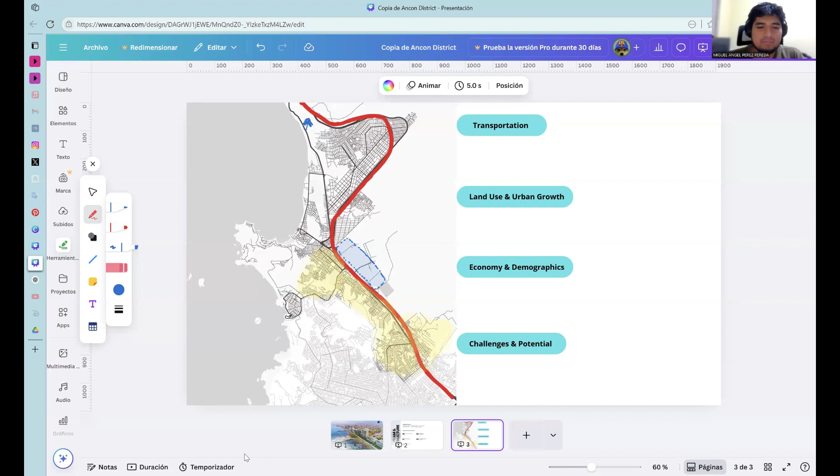Introduction to the study area. We selected an area of around 200 square meters with no existing infrastructure or housing. It's located at the intersection of main roads, which makes it a strategic location for future urban development. Within a 1 kilometer radius, we found access to the sea, exits, urban planning, and public services. All of that makes the site ideal for urban consolidation.

The zoning map shows this land is categorized under other use, but the surrounding area shows a clear trend towards residential and commercial development. We can observe that housing is progressively consolidating and commercial activity is growing along the main roads. This reflects an urban transition process influenced by accessibility and demand, which should guide future zoning and land use conditions.

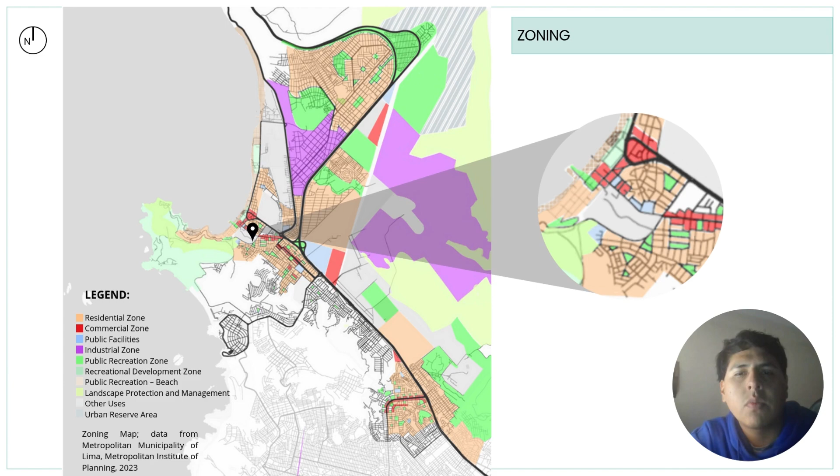Arterial roads like Avenida Jose Carlos Mareategui and Avenida Julio C. Tello, collector roads such as Avenida Las Colinas, and several local roads - the main roads are paved and in better condition, while the local streets need maintenance. The buildings are mostly low-rise, not higher than four stories, preserving the human scale and coastal view. This height restriction is part of the zoning regulation to protect the district's historical and scenic value.

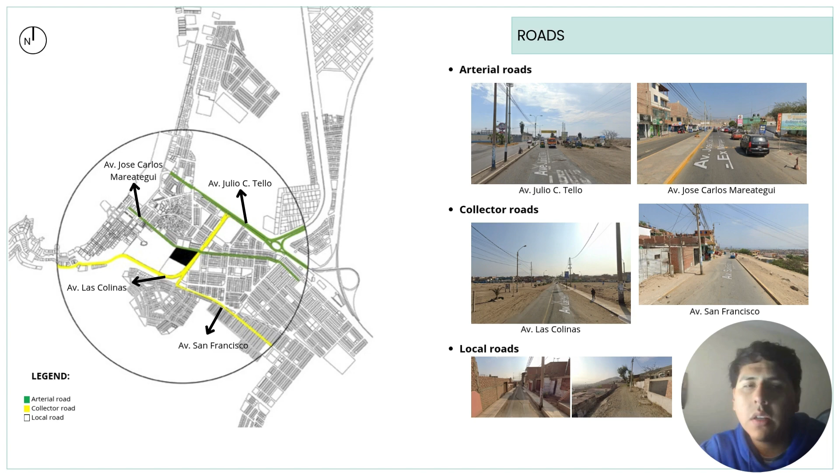Ancón faces both natural and anthropic risks. Around 45% of the area is exposed to tsunami, flooding, and seismic vulnerability, ranging from low to high depending on soil type. In 2022, a major oil spill severely damaged the local ecosystem and killed dozens of species. Social risk is also present, with crime rates increasing in 2023. This condition makes urban plan intervention necessary, with resilience and safety in mind.

This district provides urban facilities such as education centers, healthcare services, public squares, parks, commercial establishments, markets, and restaurants. Most homes have access to electricity, water supply, and sewer systems, although some areas still use cesspits or pit latrines. The main source of fuel is LP gas, with reduced pollution compared to other fuels. These elements may make Ancón a viable district for future development with proper planning.

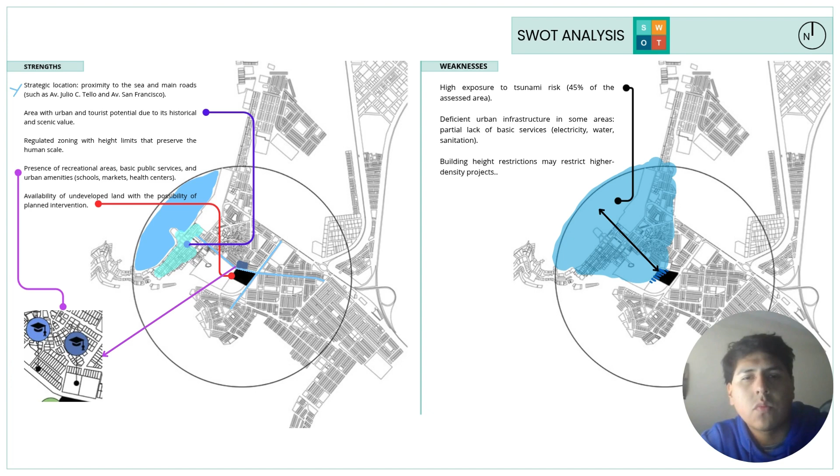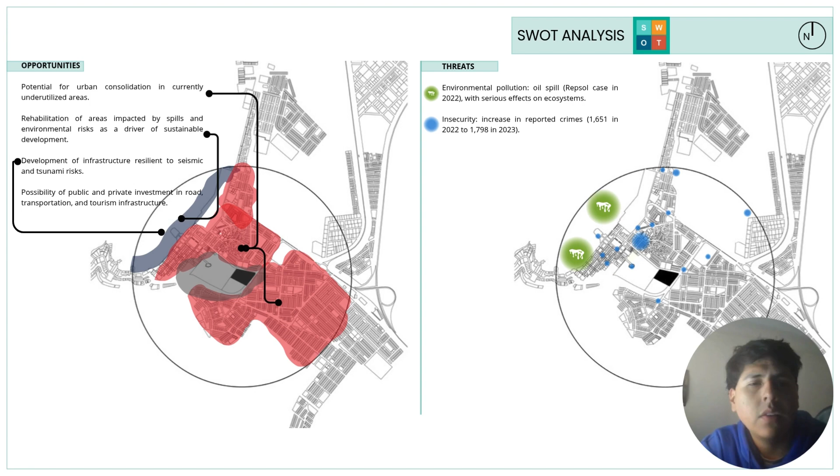However, threats such as environmental pollution and risk of crime, and weaknesses like basic service gaps and tsunami risk, must be addressed. We believe that with coordinated urban planning, Ancon can develop into a more sustainable and livable coastal district.

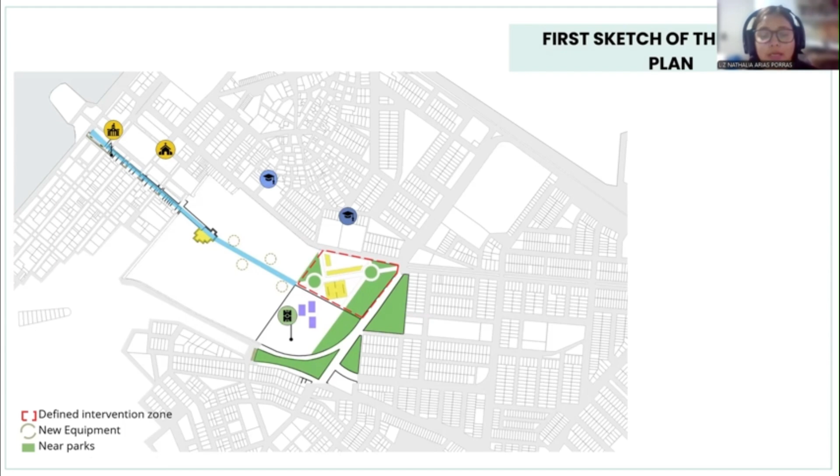About the first sketch of the master plan, our initial design proposal, we began by analyzing the existing context and nearby facilities. We found key public institutions such as the city hall and a church, and right in front of our project site there are two schools. Within the intervention area itself, we also identified a sport court.

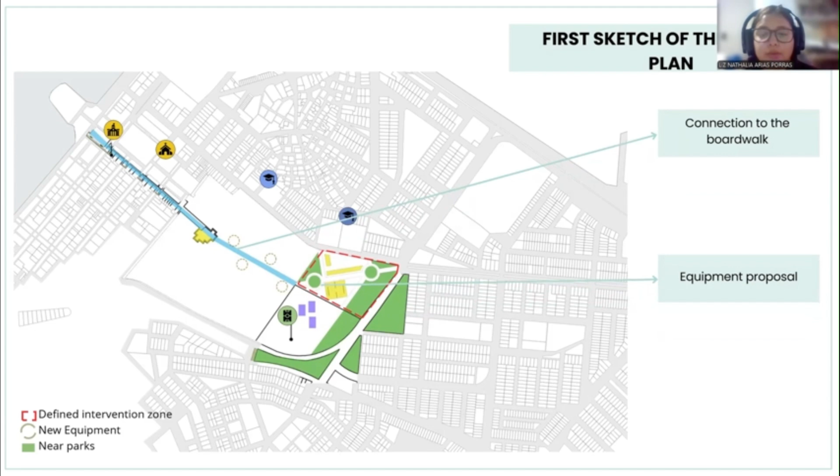Our main goal in the first approach was to create a strong connection between the waterfront and our proposal, using a linear park as a linking element. This green corridor not only provides pedestrian access and a landscape experience, but also helps integrate the area into the wider urban fabric. In addition, we introduced new public facilities that will complement the area and respond to local needs.

And finally, we decided to incorporate the existing sport court as part of the proposal, turning it into an active public space that promotes recreation and community use.

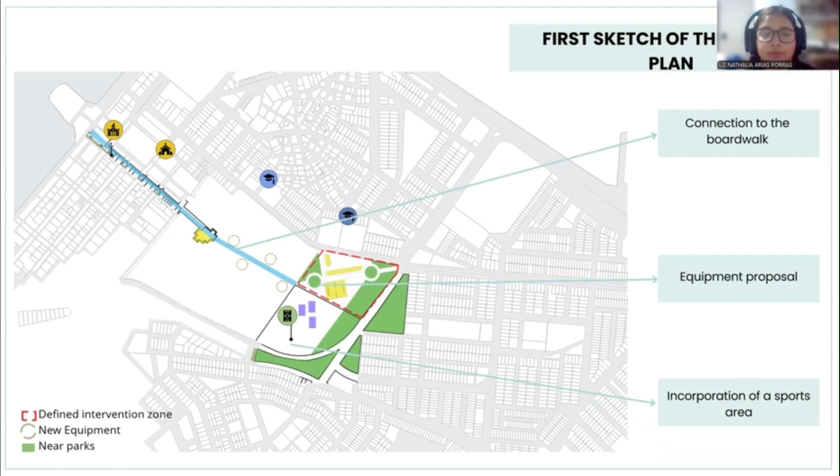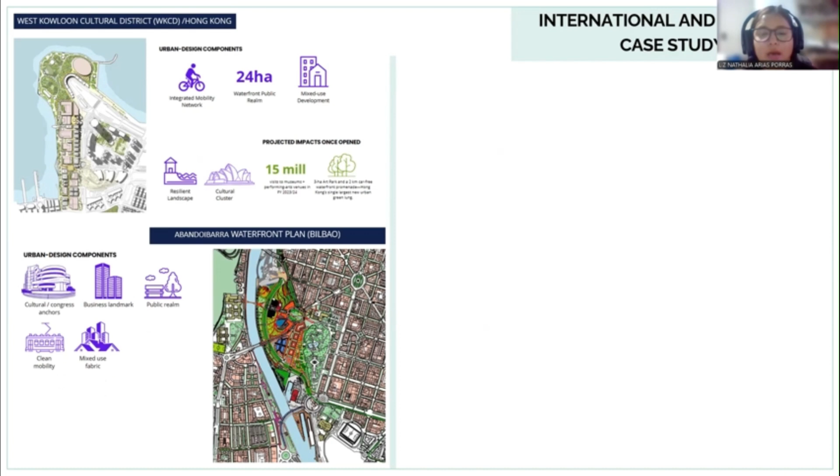About the second international case study, we present the Abandoibarra waterfront plan. This project was carried out between 1992 and 2012 by the public company Bilbao Ría 2000.

The transformation covered approximately 774 acres of abandoned dockyards. The plan prioritized green public space and pedestrian accessibility.

In terms of urban design components, we have cultural and congress anchors, business landmark, public realm, clean mobility, and mixed use fabric.

About the impact and observed outcomes: include 1.32 million visits to museums and 200,000 square meters comprising the park and river walk.

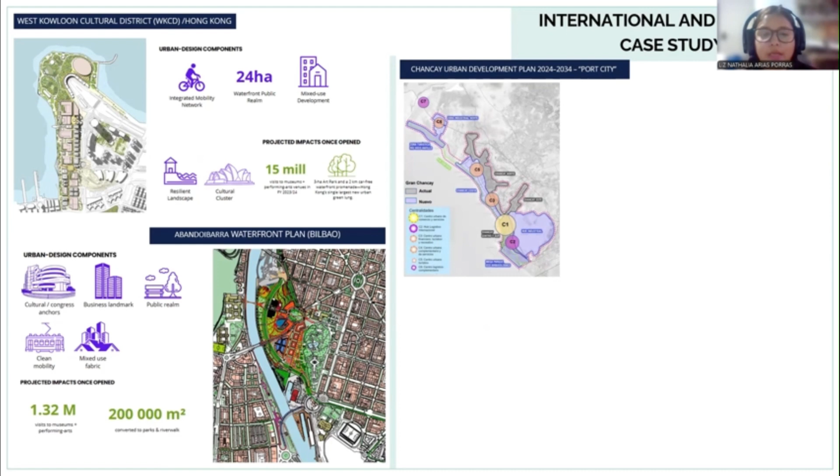About the national case study, we present the Chancay Urban Development Plan. This is located in Chancay, Peru. This large-scale urban initiative positions Chancay as a model of sustainability and progress for South America.

The project seeks to restore the coastline, protect natural ecosystems, and simultaneously promote development of a new urban center and tourist corridors. About the urban design component, the plan includes controlled vertical growth, green-blue infrastructure, 5-minute city, land management, and city-port transition.

About the project impact once complete: 66,000 annual tourist footfall and 122 projects to improve urban services and quality of life.

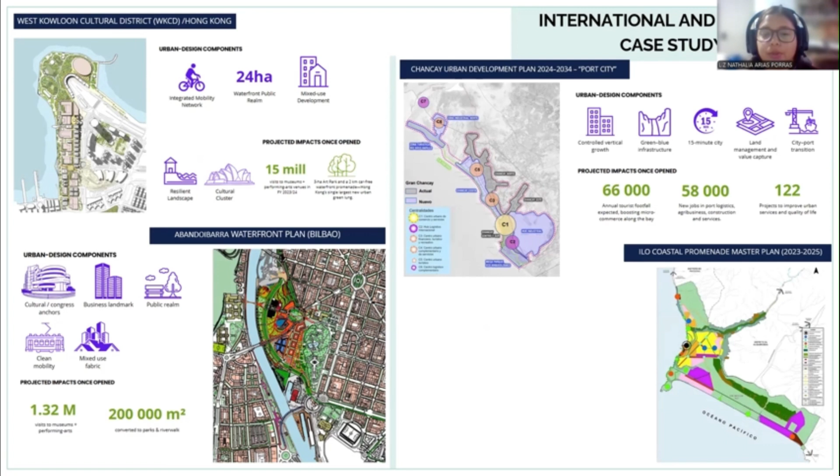About the second national case study, it's the Ilo coastal promenade master plan in Ilo, located on the coast of the city of Ilo, Peru. This urban intervention aims to transform the city's seafront into a modern tourist and recreational linear park.

In the urban design component, we have universal access and active mobility, public space, resilient landscaping, coastal defense, and tourist services.

About the project impact once complete: 40% increase in annual tourists, 25% drop in pedestrian accidents, and creation of a continuous green corridor for mitigation.

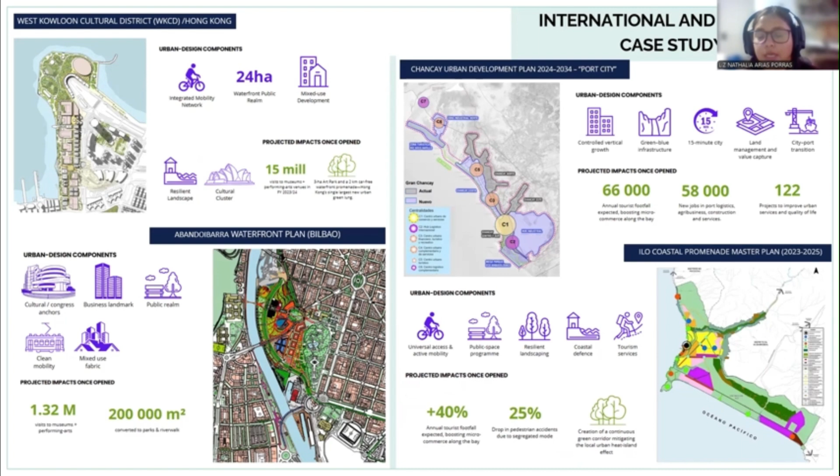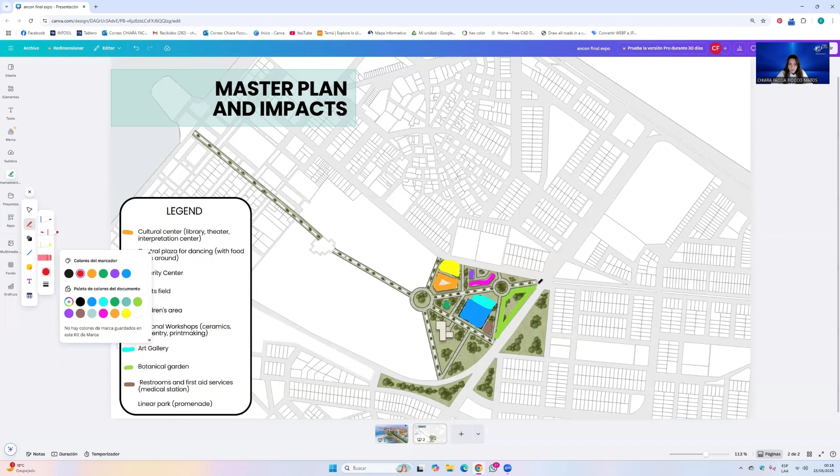Finally, one of the most important is this linear park, which I will draw with red. It's all this large space, as we can see. Why is this so important? Because in our master plan we have this cultural and social zone, and what we want is a connection between this zone and the boardwalk here, and also the sea.

This promenade has the purpose of connecting these two important zones in the district, and it will have a walk path and a cycle path.

This linear park will possibly have some commercial areas too. So the experience people will have here will be great, because they will walk around and finish in this big social space.

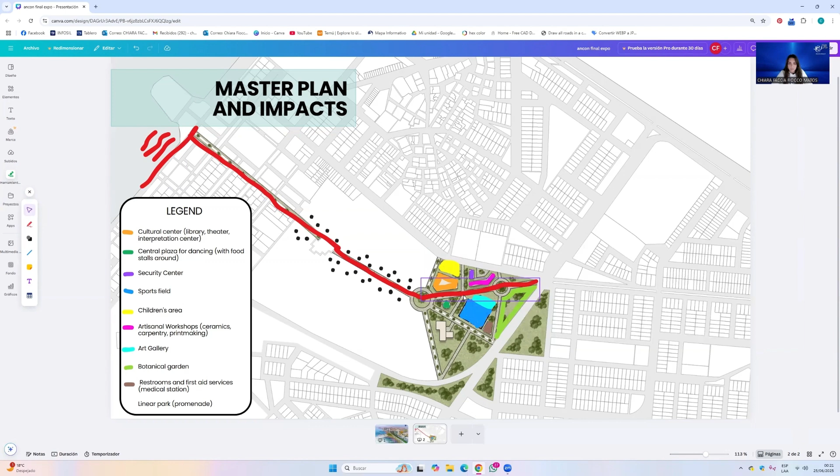So that is our proposal, our master plan, and what we want to make with this cultural and social zone.

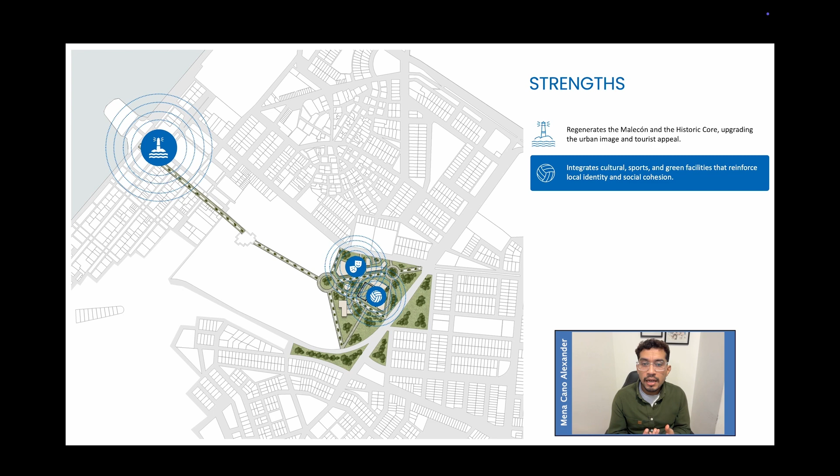Cultural, sport, and green facilities: building the cultural center, sport hubs, and linear parks will set up activity spots, growing the economy beyond beach season and boosting community pride.

Sustainable mobility: with bike lanes and tree-lined boulevards linking the historic zone and the new cultural complex, transport will be managed in a greener way.

The positive economic impact: upgrading Ancon will create direct jobs for the local people and more work through workshops inside the cultural complex.

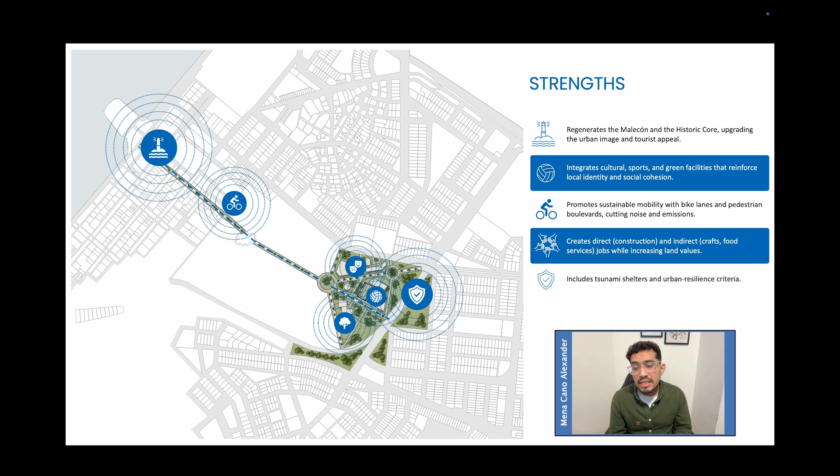Tsunami-ready infrastructure: located in the safe area with direct access from the boardwalk, the cultural complex will serve as a shelter during natural disasters.

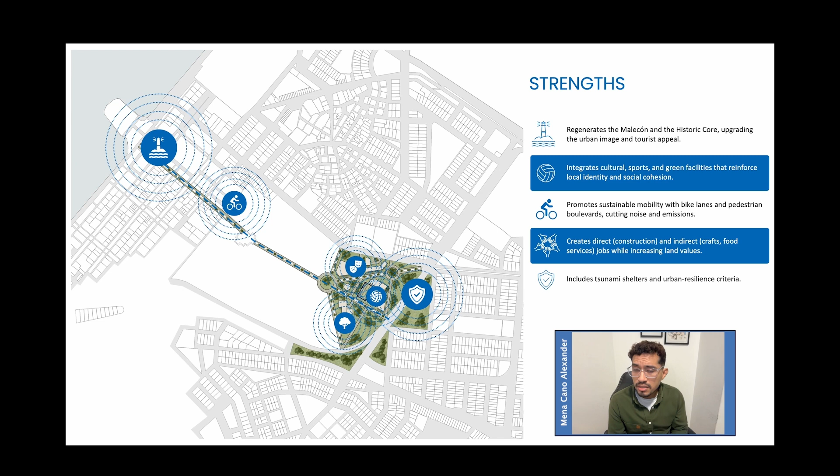Now, the opportunities that reinforce this potential. A copy-and-paste model for other beach cities: the project could be a starting point for other coastal districts to develop their areas through sport and culture.

Less tourist pressure on downtown Lima: with this layered complex, the district of Ancon can become a top choice for local travelers from Lima.

Push for ecotourism and environmental learning: restoring the coast and adding green zones will create a space that supports sustainability.

Easier access to climate and public space funds will open doors to money from multilateral banks and aid programs for strong coastal projects, filling gaps in green and blue infrastructure.

But there are also weaknesses that we must address. Risks of environmental gentrification: rising land rates may push out residents. Rent rules, mixed social housing, and temporary property plans for the future will be needed.

High demand for water, energy, and materials: the construction will need many resources. Without efficient standards and reused desalinated water, it could worsen water stress and the carbon footprint.

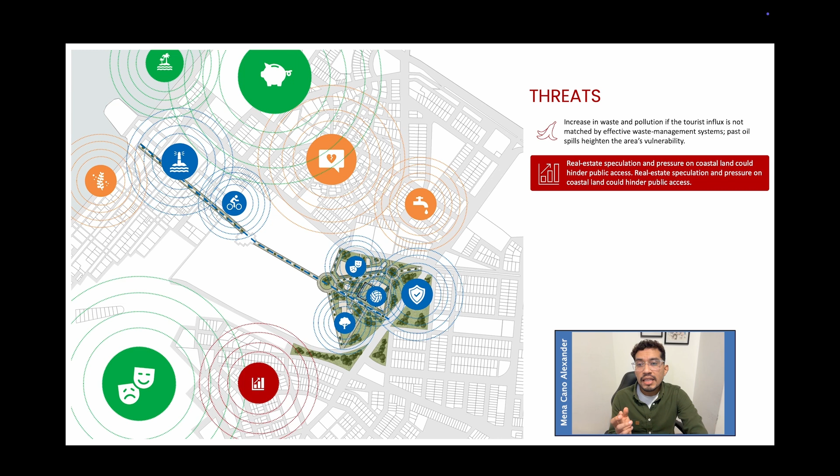Real estate speculation and pressure on coastal land: buying many lots for second homes with limited public access, it could change the town layout if zoning and anti-speculation fees are not enforced.

Extreme weather or economic crisis: a tsunami or recession will cut city income and slow maintenance, wearing down the new infrastructure fast.

Political change and lack of continuity: government swings with long-term deals will delay job permits, cut budgets, and affect investor trust, which could jeopardize the project.

In conclusion, the lasting success will depend on actively addressing the weaknesses and threats

highlighted in the SWOT. Safeguards against environmental gentrification, solid waste management systems, and strict ecosystem rules are vital to avoid negative effects. Clear governance and long-term funding must be set up early to withstand political shifts,

economic shocks, and climate hazards such as tsunamis and sea level rise. By pairing ambitious public realm upgrades with inclusive social programs, flexible green designs, and transparent monitoring, the project can turn potential liabilities into strengths, ensuring benefits for residents and visitors alike while protecting the coastal heritage for future